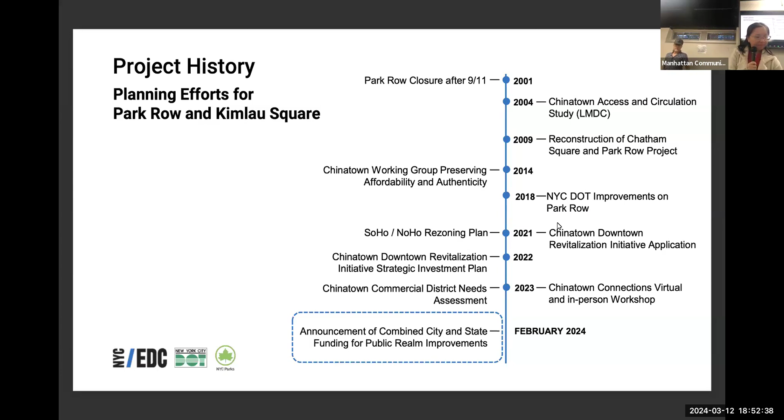So in addition to the $11.5 million, because that only really kickstarted a portion of the project, the city later decided that we would throw in an additional $44.3 million to make this close to a $56 million project. We'll get into those projects in a little bit.

Going back to some of the efforts to improve these intersections, even before this significant investment, DOT had worked on getting feedback from the community. Many of you may remember they had kiosks and DOT staff out in Kimlau Square in person and with iPads asking how you use the space and what improvements you'd like to see. That started an engagement process of collecting local community feedback to help guide this larger process, and there were also in-person as well as Zoom workshops conducted in the summer.

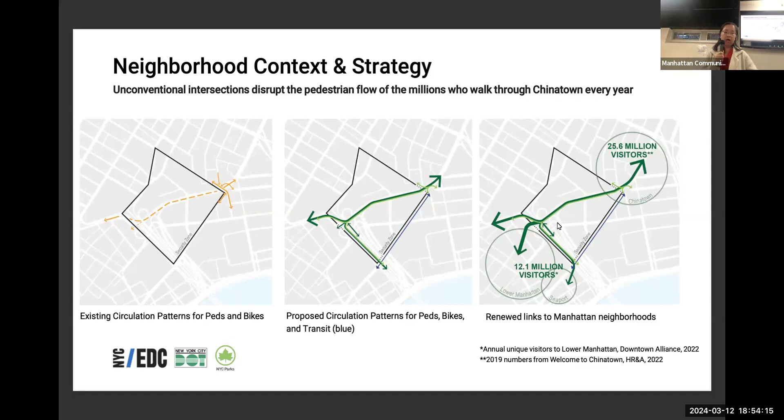So you can see here the neighborhood context and strategy we are thinking about, the existing circulation patterns for pedestrians and bikers, and some of the ideas around proposed circulation, really rooted in renewed linkage, hence the name Chinatown Connections, on how we can connect the different parts of Lower Manhattan into Chinatown from the Financial District, from the Brooklyn Bridge and the stairwell, which we'll also get into more specifically.

For those of you who don't have to brave the crossing every day, I just want to orient you for this discussion of what we're looking at when we talk about Kimlau Square today. The long crossings are shown in red. We have the War Memorial from the American Legion, as well as the Lin Zexu statue. Something that became very apparent in our outreach is that because of the inconsistent, non-contiguous bike lanes, bikers cut through the square a lot, which is not particularly safe. That's something we've been looking at, along with some of the constrained pedestrian and public space elements due to the size of the public square.

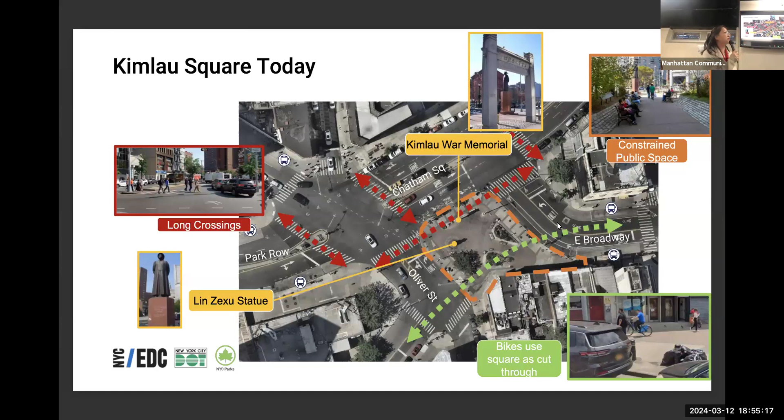So what do we want to do about this? Going back to the 3 projects that were awarded from the state: $5 million for renovating Kimlau Square. The square will get larger, and we envision more community events, more open space to draw visitors into the neighborhood, a place where people can rest and mingle, and as you're coming into Chinatown through Park Row, it might be the first place you land and figure out and orient yourself to Chinatown.

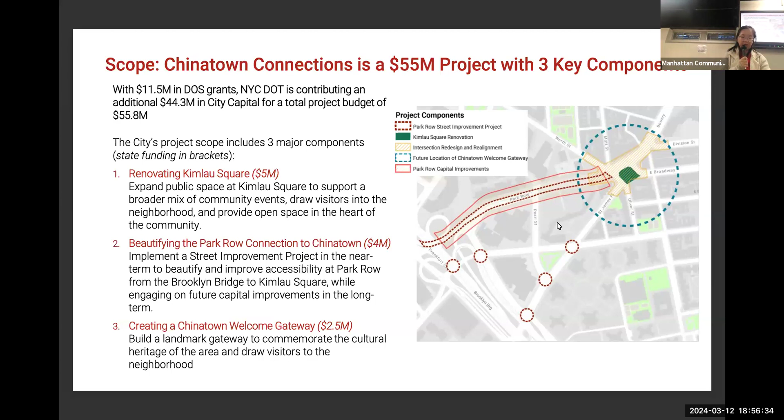Then there's $4 million to beautify Park Row connections, which DOT will talk about in a little bit, and $2.5 million to create a Chinatown welcome gateway. That's the part where I think we will have to do a lot more community engagement. Haya will talk about that component in a little bit, and we will also be doing a parallel engagement process for that. So I think that's the overview, and we're going to start now with DOT to talk about some of the steps they are taking to kick off the engagement process.

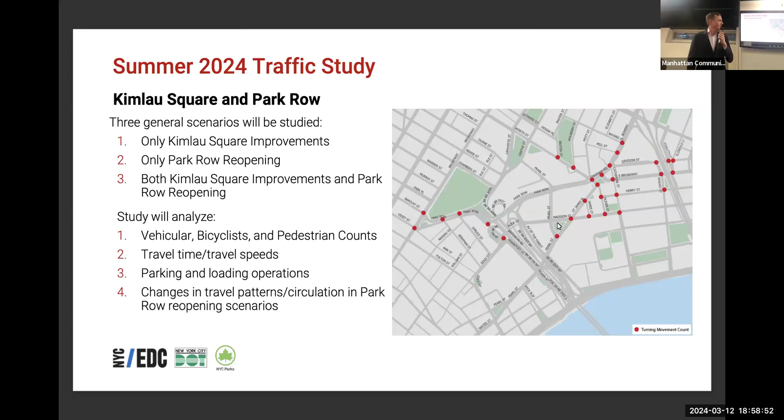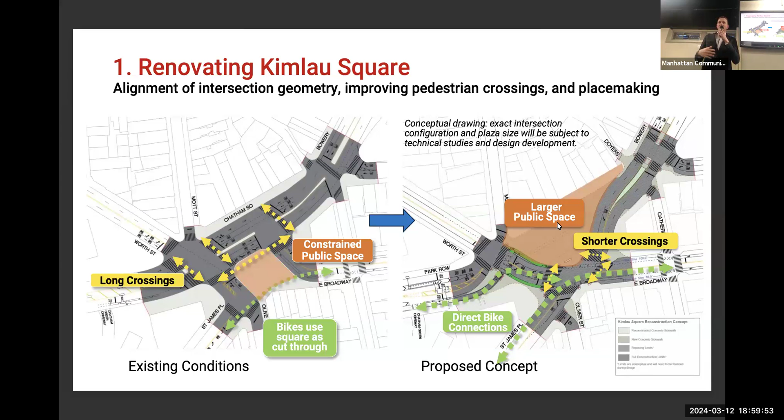We're also looking at improving bike connections to reduce conflicts between bicyclists and pedestrians, and really looking to shorten pedestrian crossings to make it much easier to navigate the square and really connect people to the surrounding businesses, but also onto Park Row itself to connect down into the next slide.

In addition to the larger Kimlau Square project, we're also looking at beautifying Park Row. We're looking at doing this in two stages. The first would be an in-house DOT expense-funded street improvement project, what we call a SIP. That would look to use a lot of our in-house toolkits to do a quick project this year, which would look to improve the security infrastructure to make it a more welcoming environment, and look to use art as a way to encourage people to use Park Row.

Right now, it doesn't feel very welcoming. It doesn't really feel like people belong there as a pedestrian. So we're looking to really increase wayfinding to draw people up from Lower Manhattan from the bridge into Chinatown. We'll be coordinating with NYPD and other agencies to accomplish this in-house project.

We'll be coming back to the board in May with a formal proposal and doing some in-person outreach in April to collect some feedback. So more to come on that later in the near term, and then we're looking for implementation of the in-house project in late summer.

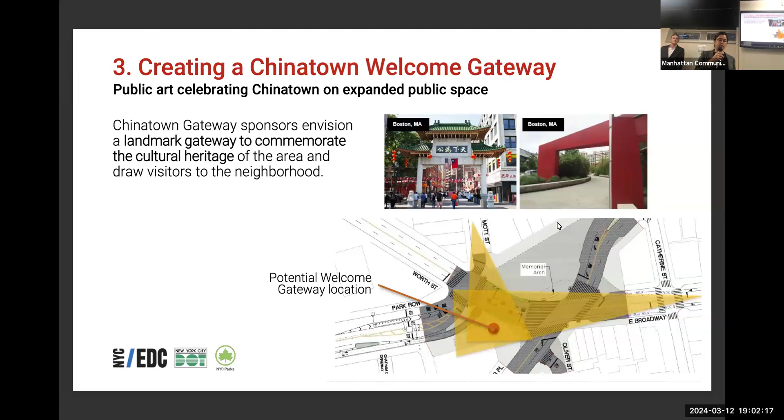In terms of project roles and responsibilities, EDC is the lead agency for this project, but it's quite a large project and an interagency effort. So in no particular order, we've listed our partner agencies here.

New York City Cultural Affairs will be helping us with the gateway component of this project, particularly that artist selection process, to make sure it's open and responsive to the community. DOT just went over the part of the project they're most keenly involved with. And the New York City Parks Department will also be supporting the work on the plaza, as well as the current Memorial Arch renovation that's currently in procurement.

Our executive agency, as mentioned earlier by Gigi, through the DRI is the Department of State, since they've contributed a grant award to each of these components. We'll also be bringing on board a consultant team to help with engagement, planning, and design—a multidisciplinary team of experts on these components. They'll be retained through EDC and will lead that work as well.

Next slide. We'll be meeting most frequently with the Chinatown Connections Working Group. We kicked off that meeting last night, and a number of people in this room were at that meeting.

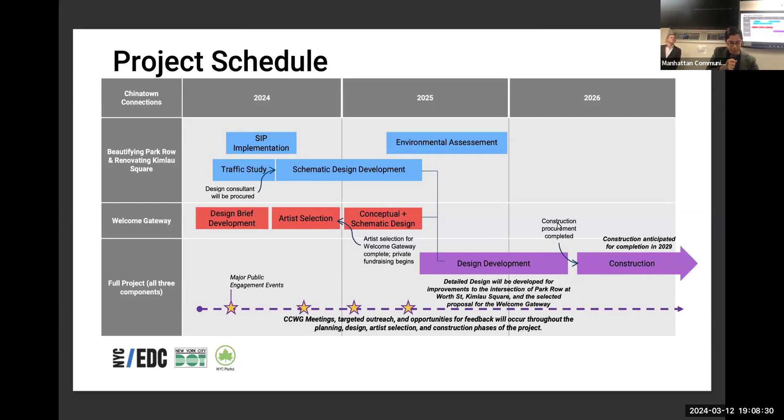So moving on to nearby projects. Our team is aware that there's a lot of construction upcoming in the next few years in this area. We want to make sure that we're doing a coordinated approach, both in terms of stakeholder engagement as well as construction impact mitigation.

So making sure that people don't feel fatigue over this set of projects that we're aware of in the community, particularly thinking of some of the larger construction projects like Manhattan Detention Complex or 70 Mulberry reconstruction. We want to make sure that our construction timelines aren't overwhelming the community.

So that's just our accounting of nearby projects, as well as identifying a few completed processes.

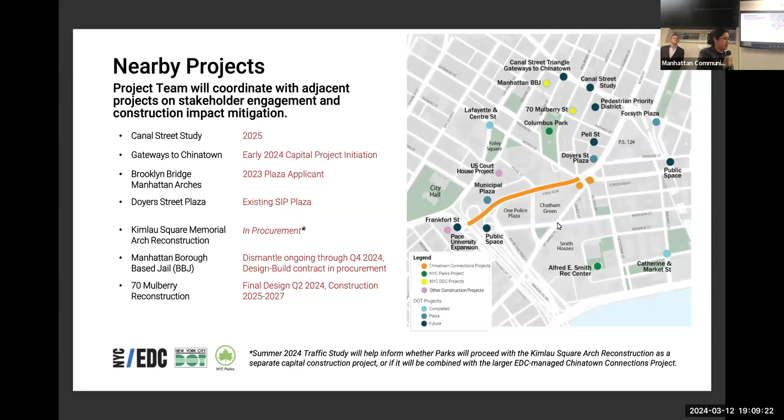So just wrapping up with some next steps for our project. The first one, we're here today at CB3. We'll be presenting to CB1 next week.

We're working on engagement consultants, so that consultant will be brought on board by next month. We're currently deep within the process of reviewing proposals and selecting a team for that.

And then we're going to be kicking off a gateway subgroup, so conversations with community working group members really just focused on that gateway project in a more focused way.

Over the summer, we expect that DOT will report back on their findings from the traffic study. We're planning to hold a first public engagement event, and then SIP implementation will also commence. We'll likely report back on what that looks like and what to expect there in more detail, closer to that time.

And then we'll be releasing an RFP for the planning and design team, which will be brought on board by the fall and carry the process into construction. That's it.

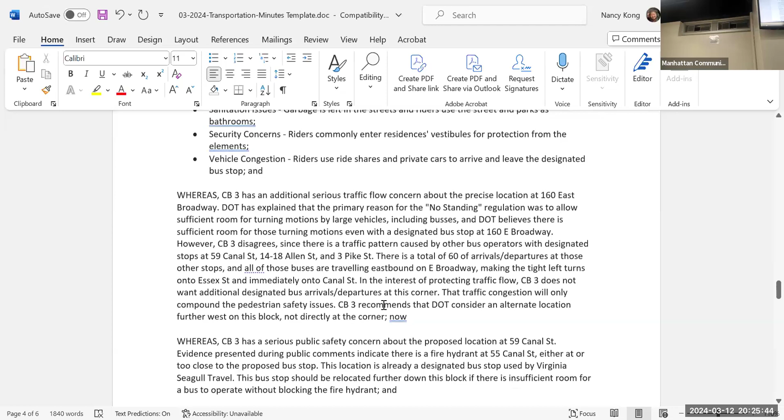Next, whereas, that's about the saturation point, and that's lifted from an old resolution from many years ago, but it's still true. Susan, the community board office, we used to receive these complaints- these were four things you had in the past. Would you say we still get these complaints about? I haven't had a complaint. Okay, yeah, well this is a problem. They're still operating, to be honest. They are, yeah, we know that. I know they are, they live down there too. Used to, right. Yes, yeah.

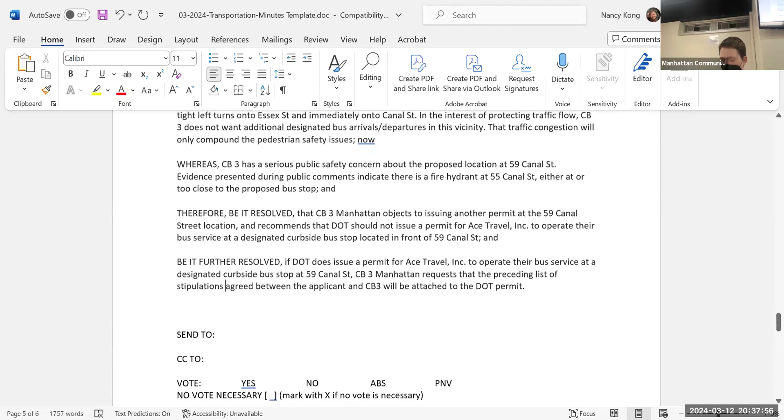No more discussion? Vote? All in favor, we can just do it all in favor. All in favor? Anybody opposed, here present, not voting or abstaining? Let's do the roll call. Let's see that so you can stick the count.